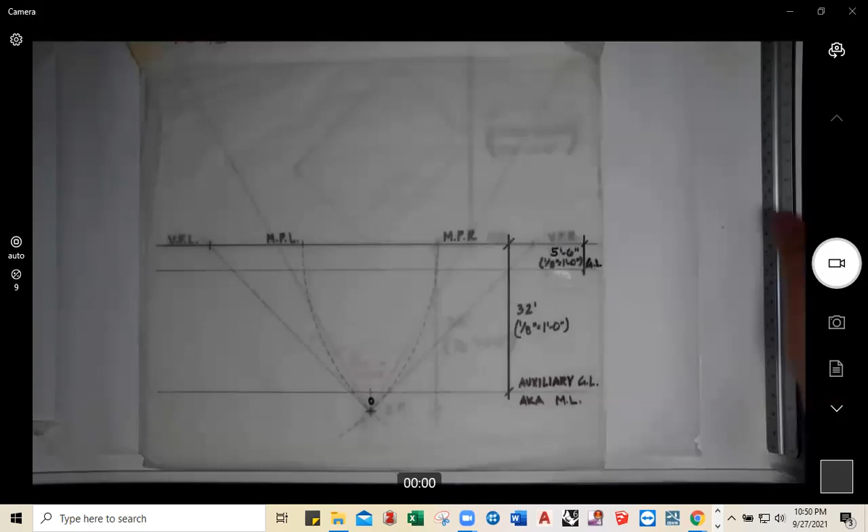Hello, everyone. We're going to go ahead and start working on our second sheet for assignment number 3. You all are to this point already. Before we move on to the next sheet, as a reminder, these dashed lines, I asked you not to draft those up, right? They were just there for visual reference so that you can get your measuring points.

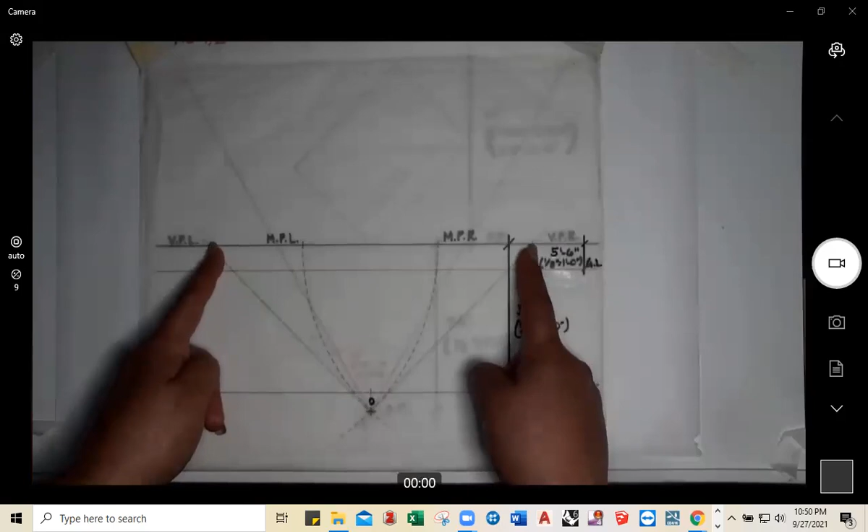Now, when it comes to these 45-degree lines that you use to get your vanishing points, I'd like you to take a moment to erase them. Go ahead and erase these diagonal lines, these 45-degree lines. Keep the intersections because we need your vanishing points, but go ahead and erase these lines. The reason being, we're going to create a baseline and they're going to look very similar to these, but I don't want you to get them confused.

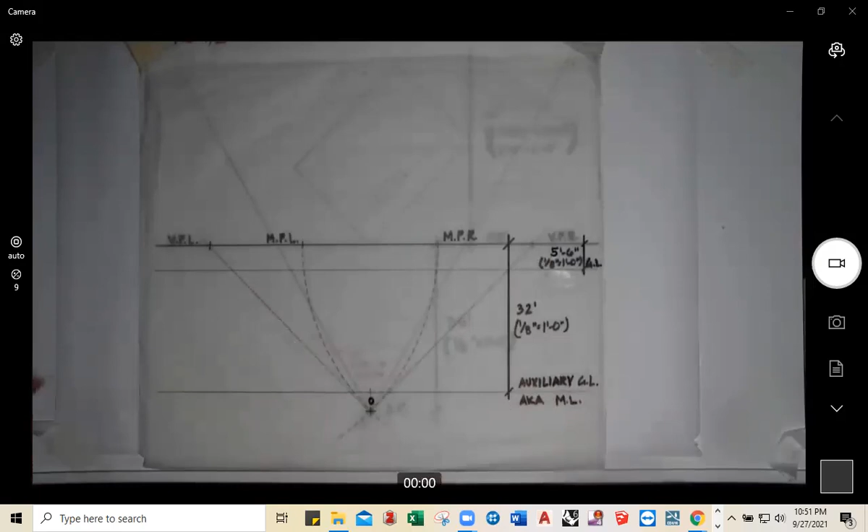Okay, so go ahead and erase these lines. I'm showing them in green on my sheet, but if you have them, go ahead and erase them. Okay, once they are erased, we can move on to our second sheet. So I want you to put down a new sheet of trace on top of the one you were just working on. Okay, you're going to have a new sheet of trace.

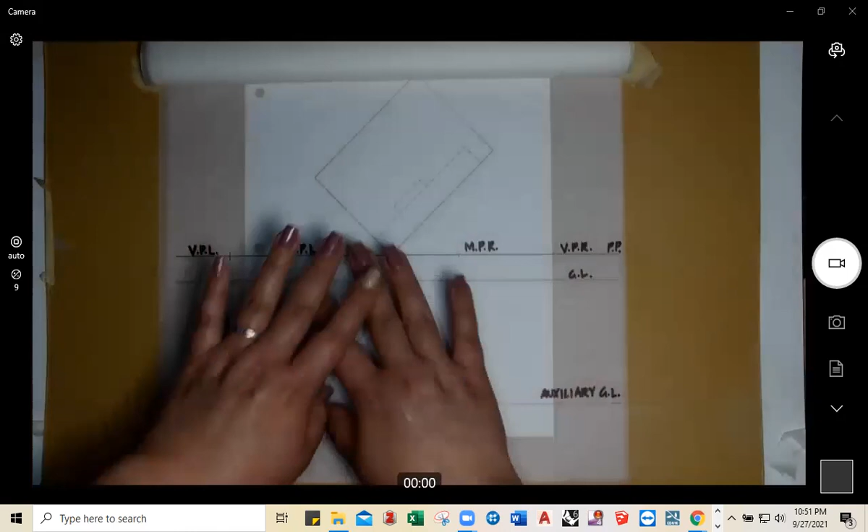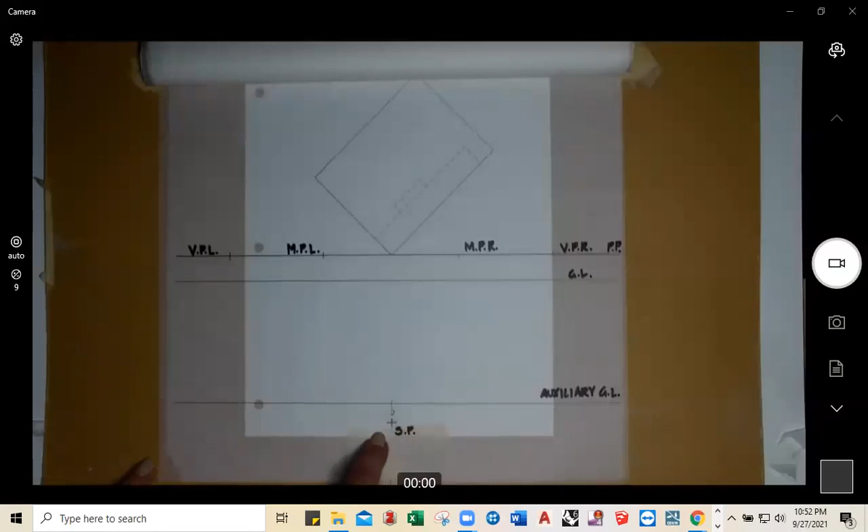So right now, this is roughly what your sheet should look like. Your bottom sheet should look like this, and then you should have a new one on top. So the bottom sheet should have your rotated roof plan. You should have your picture plane, your vanishing points, left and right, your measuring points, left and right, your ground line, your auxiliary ground line or measuring line, your stationary point, and the 0. So your first sheet, all cleaned up, should look like this.

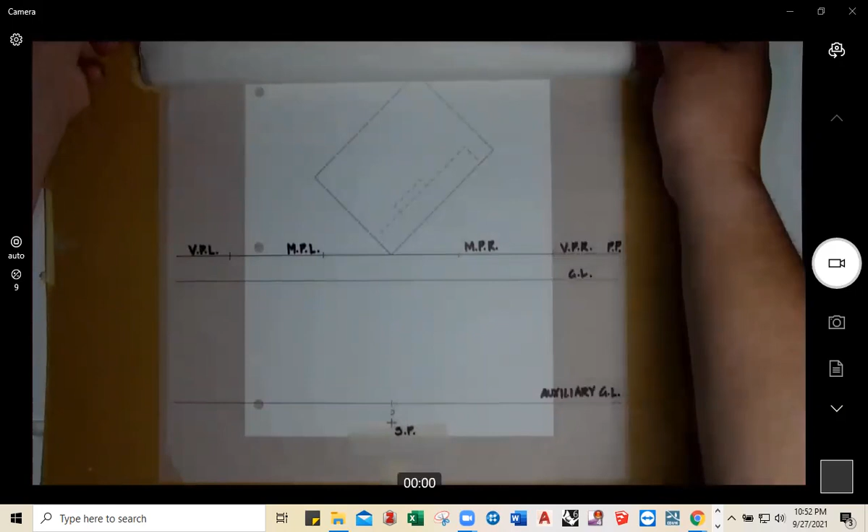Okay, awesome. Second sheet. Now that you have your second sheet on top, we are going to draft up your baseline. The baseline is going to help us to create our 2-point perspective grid. I am showing these lines as dashed lines, but that's just so that you can reference them. I wanted to make sure I distinguish them from the green lines I had before, but since you already erased them, it's good. I do not want you to draft these as dashed lines, but we do need these lines. So these would be solid lines for you.

Solid lines for you, going from your vanishing point right to your 0, not your stationary point, to your 0. That's why I had you erase the other lines, because the other ones went to the stationary point and can get confusing. I want you to go from your vanishing point to your 0, and you can write baseline, so you know that those are your baselines. Vanishing point left to your 0. Again, I prefer you do solid lines. I have it in dash, so you know that this is new. This is on our new sheet.

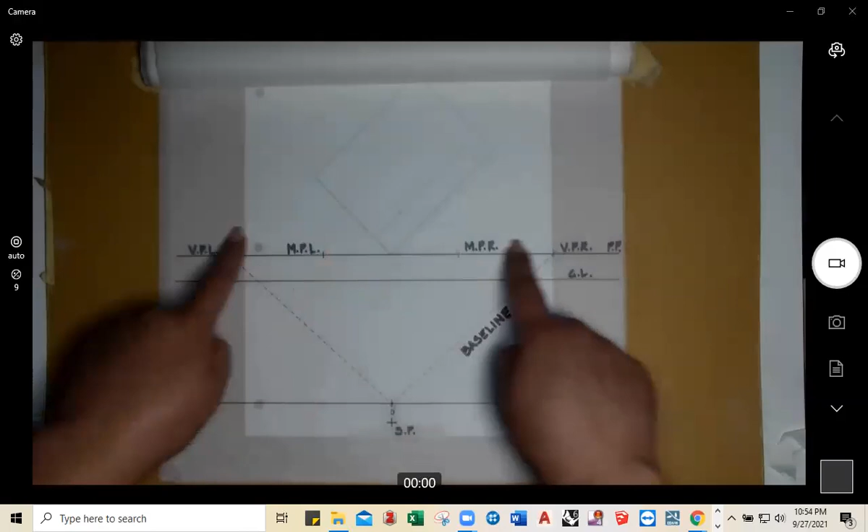Depending on the type of trace paper you have, if you find it hard to see what you have underneath, you can go ahead and trace your picture plane and your ground line and your auxiliary ground line and your stationary point and all these points using your drafting tools, using your parallel bar, using your triangles. If you'd like to trace them, you can, if you can't see them very well.

All right, so now we have our baselines from vanishing points to the 0, not the stationary point. Next, we are going to create a 2-point perspective grid, and we are going to define the footprint of the building in this 2-point perspective. In order to do that, we need to go back to the overall dimensions of the structure. We see here on this side it's 24 feet.

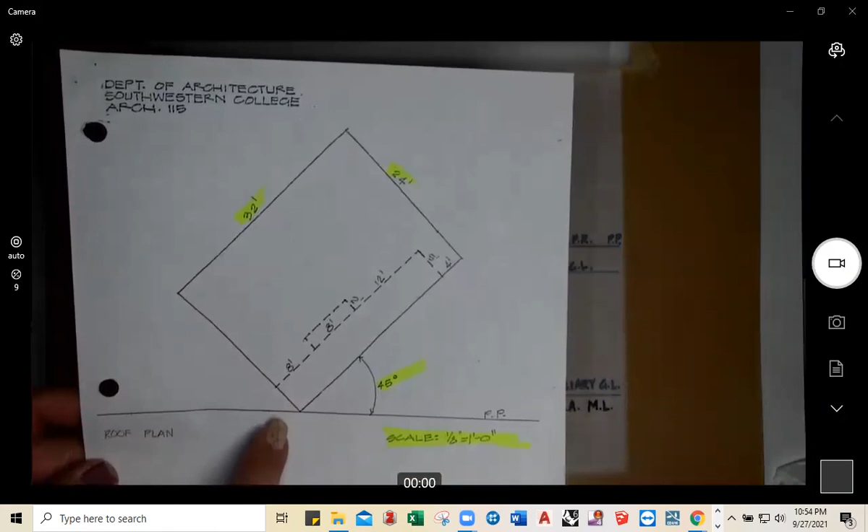When we're measuring on our grid, this dimension is on the left side of the building, so we're going to measure that on the left. This dimension here is on the right-hand side of the building, so we're going to measure that on the right.

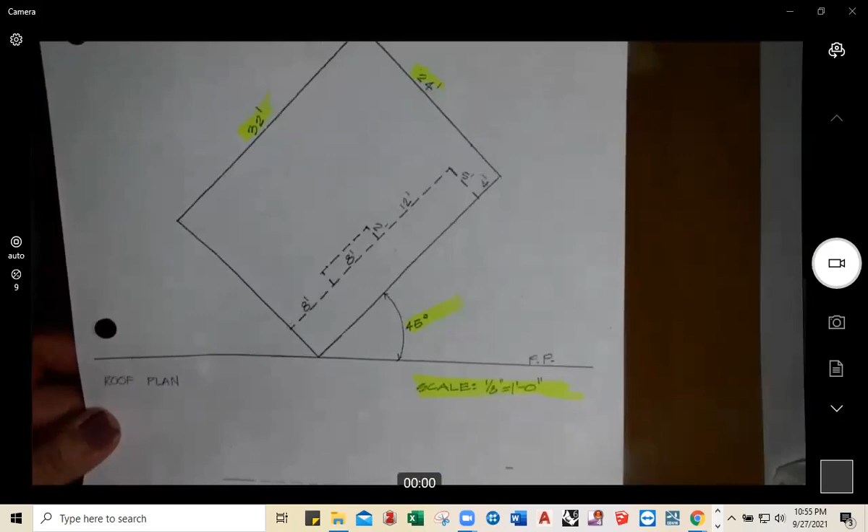Okay, so from our measuring line where you have your 0, you are going to measure 24 feet, which is this here, 24 feet on the left-hand side of the 0. So take your 1/8 of an inch equals a foot scale, and you're going to go ahead and measure 24 feet and put a little tick mark on your measuring line.

Okay, then on the right-hand side, you have 32 feet here, right? That's this distance here. You're going to rotate that. So 32 feet on the right-hand side. You're going to measure 32 feet here. Put a little tick mark. So you have a tick mark at 24 feet here and a tick mark at 32 feet over here.

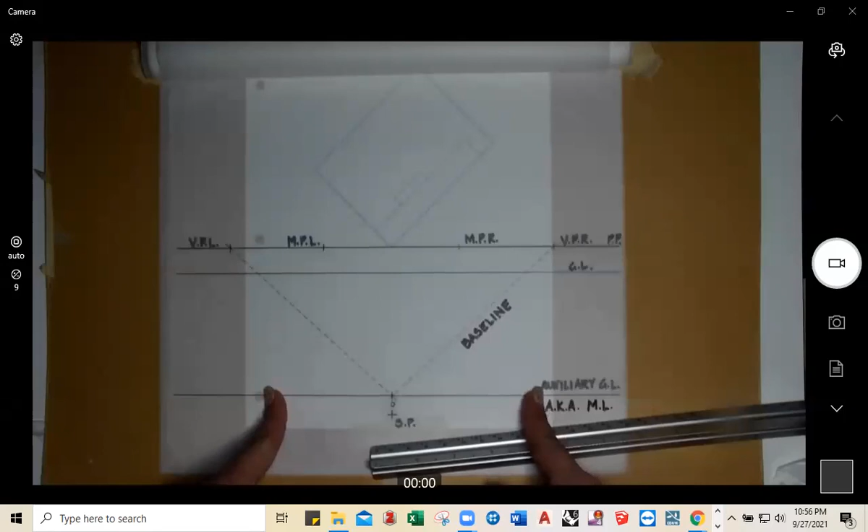Okay, next, what are we going to do? Well, in order to get the footprint in 3 dimensions, right, we're starting to get this 2-point perspective, you're going to go from measuring line to your measuring point. You're going to draw a line from measuring line to measuring point.

Then where it intersects the baseline, which you have as a solid, you're going to pull lines to your vanishing points. So where that line intersects the baseline, you're going to pull it to your vanishing points. Let me show you what I mean.

So let's start with the 24 feet that we have to the left of the 0, 24 feet at an 1/8 of an inch scale. I have mine dashed just so that you can see that these are on the new sheet, right? I wanted to distinguish them from our first sheet. So these dashed lines are on our second sheet, okay? Do not draft them up as dashed lines. You are to draft them up as solids. I have them as dashed just to distinguish them from what we did on our first page, okay?

So here, 24 feet on the left-hand side. From here, you're going from the measuring line, that tick mark, draft up a line to your measuring point. Okay, you're just connecting those 2 points. It's not in any certain angle. Where that line intersects the baseline, you're going to pull a line to the vanishing point. Okay, so here we're on the left side. We're going to measuring point right, and where it intersects the baseline, we're going to vanishing point right.

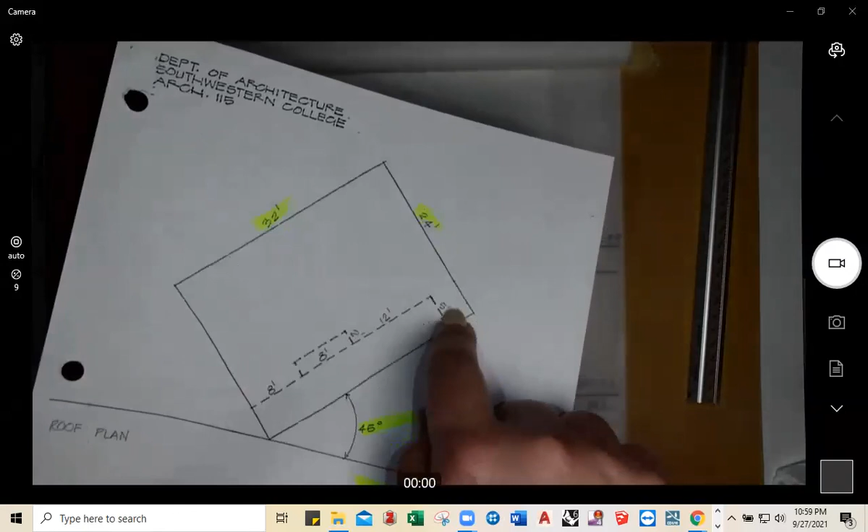So we're going to take these dimensions to draft up these lines down here to form part of the 2-point perspective. So again, we're going to take these dimensions to measure that down here. How do we do that exactly? Well,

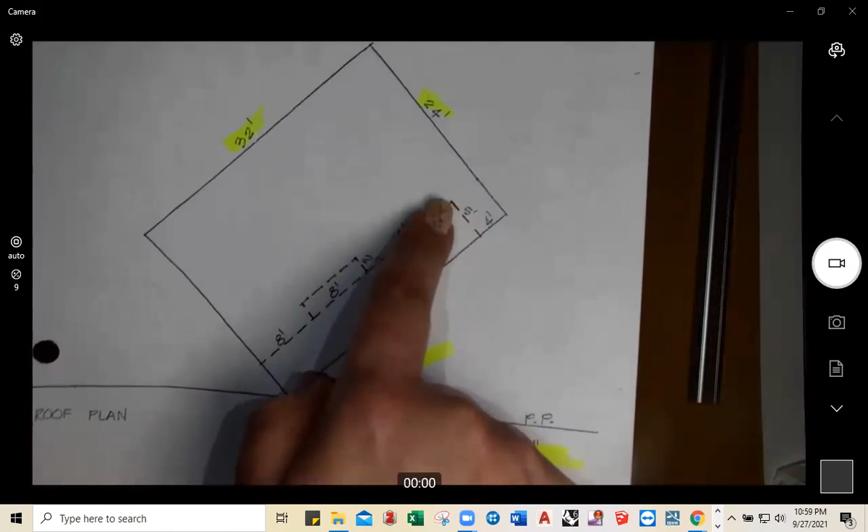on the left-hand side, we're going to measure 5 feet from the 0. So this is our 0, right? So from here to here, it's 5 feet. And then we have another 2 feet. So we're going to put a tick mark at the 5 foot mark, another tick mark at the 7 foot mark, because 5 plus 2 is 7.

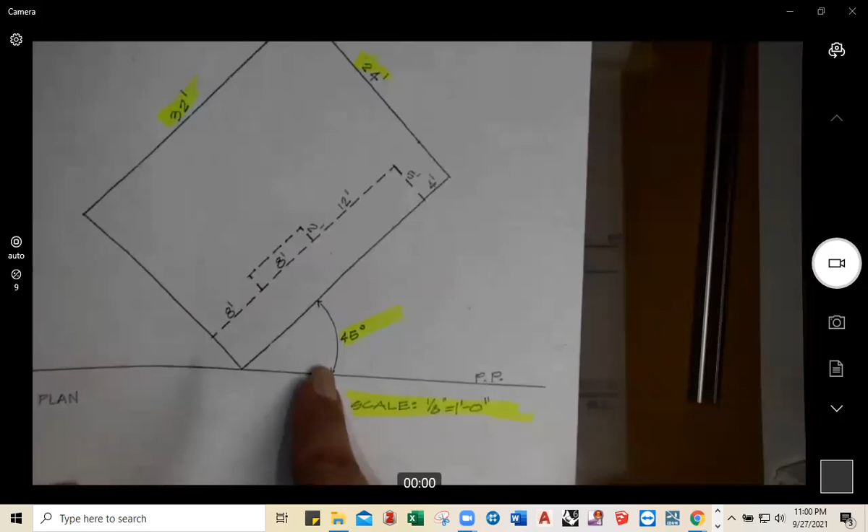And then on the right-hand side of our measuring line, we're going to measure 8 feet, put a tick mark, then another 8 feet, so 16 feet, tick mark. And then we're at 12 feet, right? So that's 28 feet. We're going to go ahead and mark that on the right-hand side and then do just what we did here to create this. We'll do the same thing, but we're going to do that with the dimensions down here.

Okay, so let me go over that with you. Those dimensions I just shared with you, we see them here. Let me zoom in so you can see them a little bit better. Let me focus. Let me straighten this out a little bit.

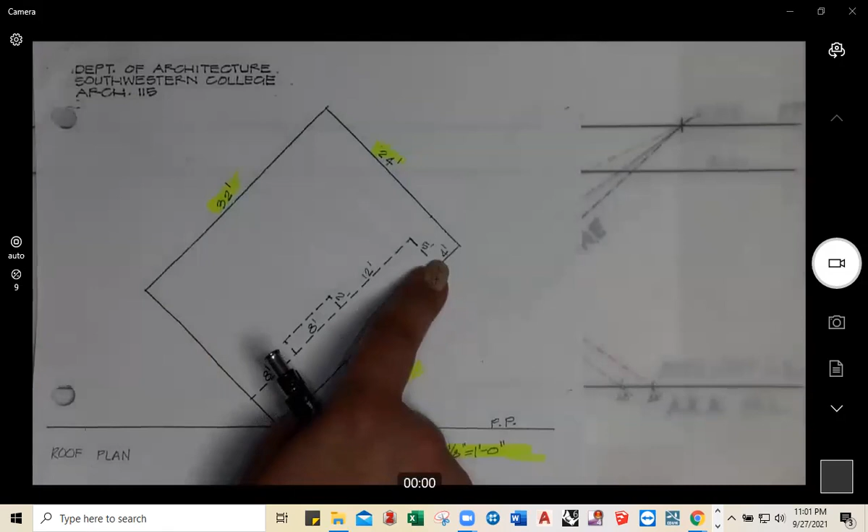Okay, remember we said on the left-hand side here, we're going to measure 5 feet. So from the 0, 5 feet at 1/8 of an inch scale, plus 2 feet, right there. So 7 feet, because 5 plus 2 is 7. All right, that's on the left.

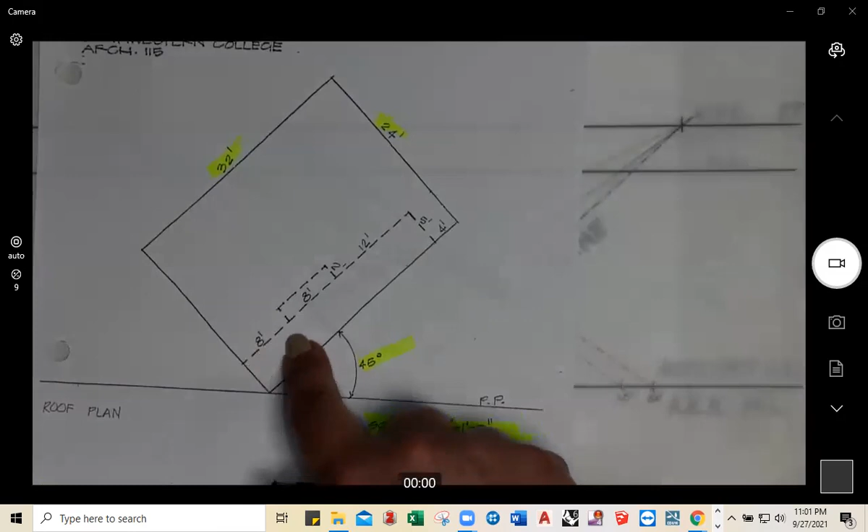On the right-hand side, if we were to rotate this back, we're measuring 8 feet. So from the 0, you're measuring 8 feet, and then another 8 feet. So from 0, that's 16, plus another 12 feet, which would be 28 from the 0. For each one of these dimensions, you're going to do the same thing that you did for the 24 foot mark and for the 32 foot mark.

You're going to go from the tick mark there on the measuring line, from measuring line to measuring point. Then where it intersects the baseline, you're going to go to your vanishing point. Okay, put 7 foot mark here. From the tick mark here on your measuring line, you're going to your measuring point. Where it intersects the baseline, you're going to pull a line to your vanishing point. Same thing on the opposite side.

8 foot mark here, you're going to draft up a line from your measuring line to your measuring point. Where it intersects the baseline, you're going to go to your vanishing point. Here, measuring line, draft up a line to your measuring point. Where it intersects the baseline, you're going to go ahead and draw a line to your vanishing point.

And the last one as well. From your measuring line, you're going to go to your measuring point. Where it intersects the baseline, you're going to pull a line to your vanishing point. And only the lines going to the vanishing points are the ones you're going to keep. Those are the ones you're going to darken up.

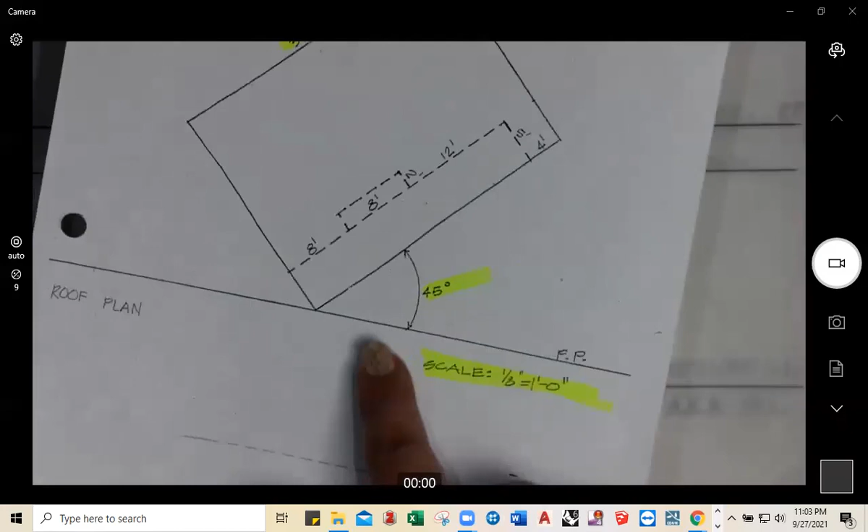And if you notice, you're going to start to create this here. Okay, that's what we're doing. That's what you're creating here. Okay, but only keep the lines that are going towards the vanishing points. All right. Let me see if I lift that up a little, just to make sure it's clear. Okay. Once you get to this point, then we can start drafting up the 2-point perspective up here.

Okay, so again, we started off with rotating the plan. Now we're projecting the plan, and we're using this 2-point perspective grid to now begin to draft up our 2-point perspective drawing. Okay. All right. So I'm going to go ahead and pause the video here, and then we'll go ahead and prepare for drafting up the 2-point perspective of the structure.